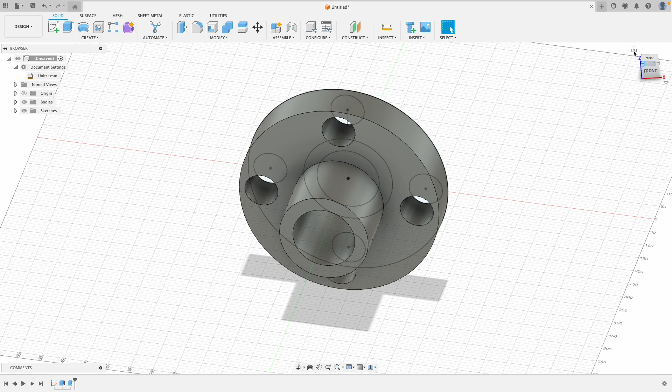So I have the object we will be making today pulled up right here, and this is what it will look like, our final product. This design is pretty simple. It may look complicated, but really it just consists of making a bunch of circles at specific dimensions, using the circular pattern tool, and extruding it. So let's get started.

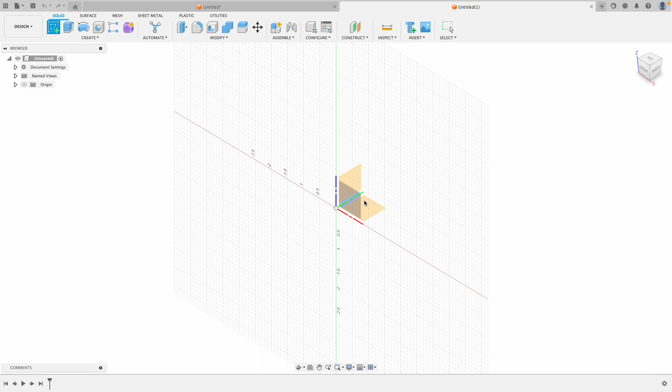Let's make a new design and go to create sketch. That's where I want to start off, and I want to make my sketch on the XZ plane.

First I want to make my overall circle, and before I do anything, I want to go to my document settings and make sure I have the right units. For this design, I'm going to use millimeters. However, if you have your own specific dimensions and units, change that to your liking. I'll set it as default, but only if I know I'm going to make more designs with millimeters. Otherwise you can press OK.

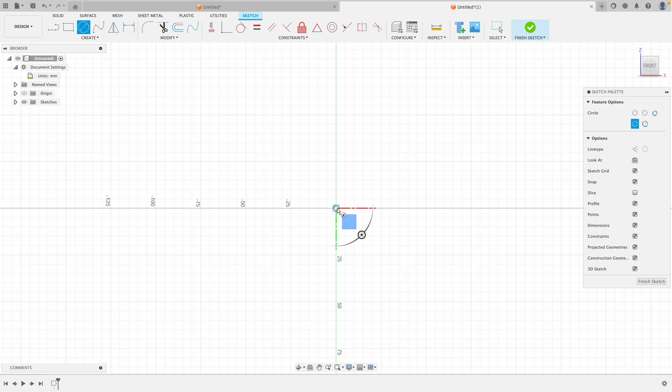Now let me start by making my big circle. This circle is going to be 450 millimeters. Let me zoom out.

Now let's make a couple more. This is going to be the inside, or the middle part of this object, and this one is going to be 200 in diameter.

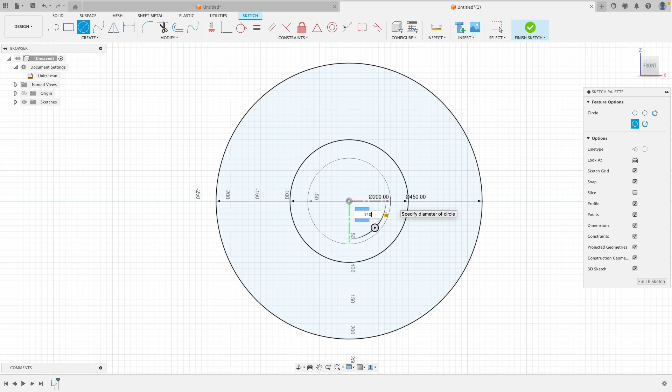Now let's make our inside circle. This one will be our hole that cuts through the object at the very center, and it will be 140 millimeters. So we have our basic object created.

Now what we need to do is make our circles going around this big circle. To do that, let's first make a construction line and use it as a reference point so we know exactly where to start. I want to click on the center point and go up. This is where I will make my first circle. You can make it wherever you want, then use the circular pattern tool to repeat it all around, but I'm going to start up here.

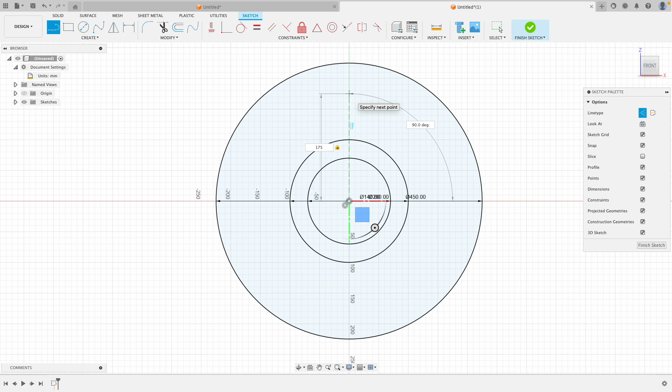I want to go up 175, and here is where I want my point to be. So I can click on my circle tool now, making sure I have construction off for this one, and use this as my starting point. I know that I want this circle to be 75 in diameter.

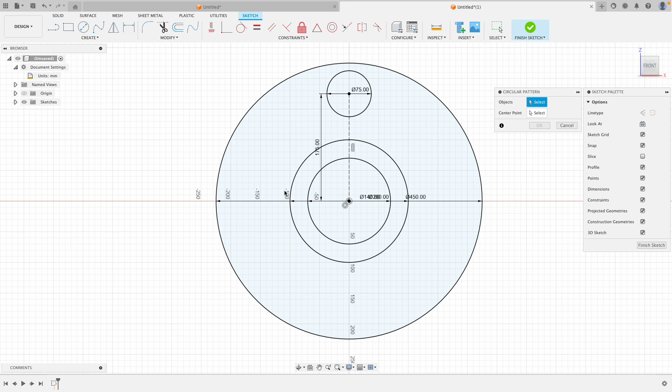From here, I want to go to the drop-down menu and use the circular pattern tool. I click on this circle, and for my center point, I select the origin. I can see that I only have 3 in quantity and I want 4, so I just go up one more. And there you go.

Now we have our basic sketch done, and all that's left to do is extrude it. There's many ways you can extrude it - you can do it the long way and extrude everything at once and then cut inside. However, I'm just going to extrude the base first and then extrude the middle.

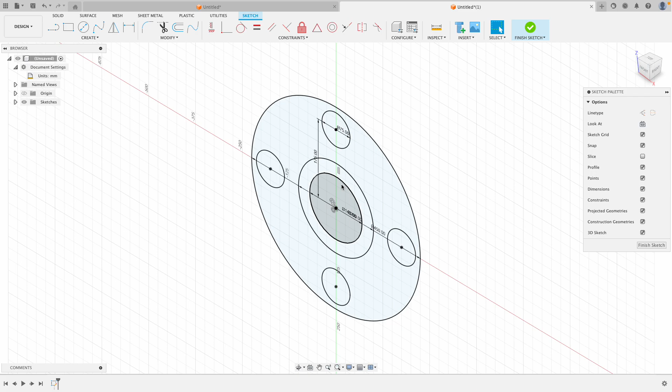So let's right click on this and press pull, making sure I have the outer part selected. Let me go this way towards me, making it negative 85.

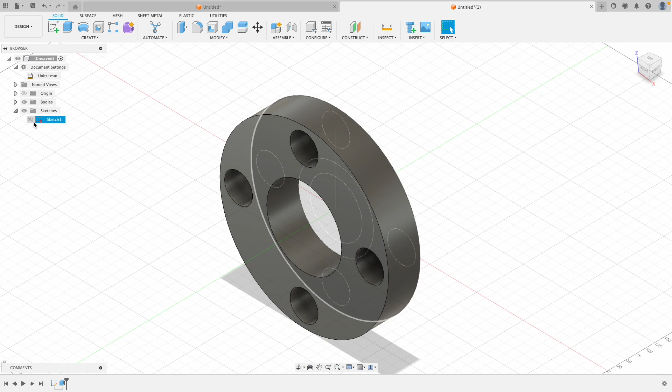After I press enter, my sketch will disappear. However, you can just go up to the drop-down menu in sketches and make it visible. No problem - and now I have the face that I want to extrude.